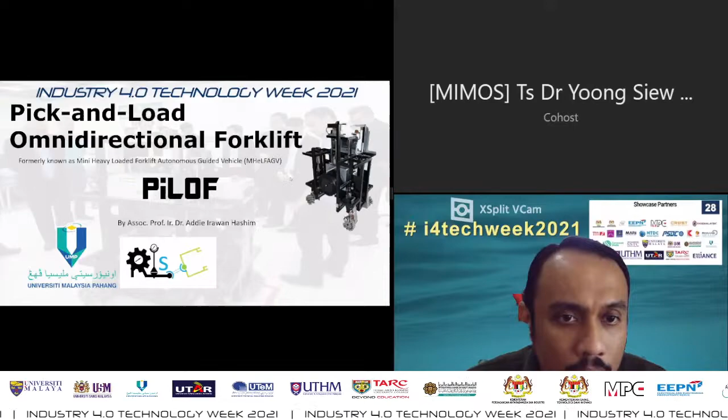For this slot, I would like to share about one of my projects with industries related to robotics in industries. For today's presentation, I will give some overview regarding the products I have developed with the company named Vacuumschmelze from Germany. This system we call the pick and load omnidirectional forklift.

This project, I'll go through the introduction first. It actually came from the idea that VAC, or Vacuumschmelze, would like to have a very small forklift, which was not available at that time in the market. This small forklift needed to have the capability to pick up quite heavy copper spools, which are their raw materials, weighing about 30 to 50 kilograms.

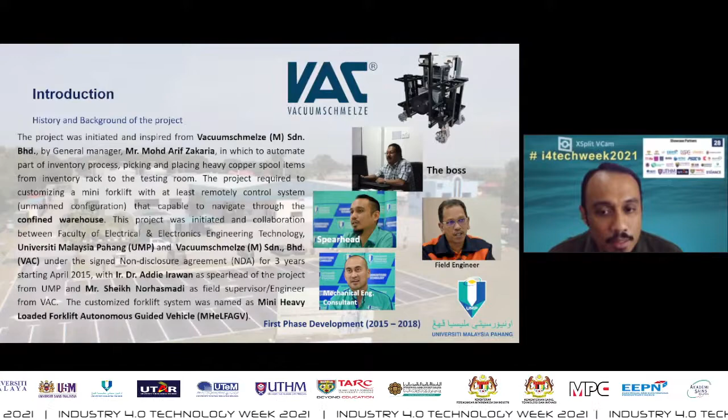From this idea, Mr. Arif, the boss there, called me for collaboration, and we teamed up into sub groups, one electrical and one mechanical, handled by my partner Dr. Akhtar, a mechanical engineering consultant, supported by their field engineers, Mr. Sheikh. We generally started the project with a capstone project from the students, then enhanced it in the internship program with VAC, and then continued into the final project.

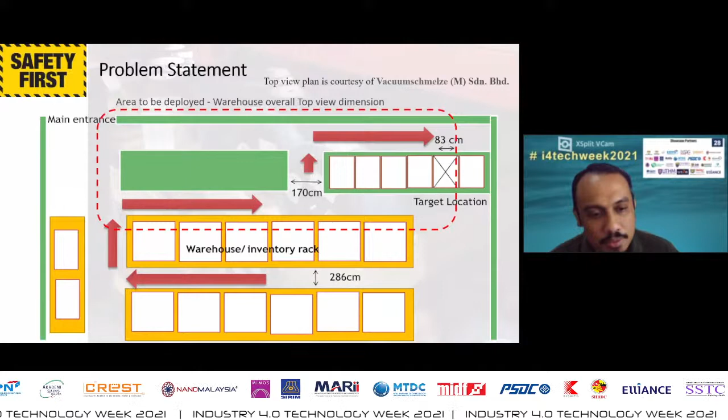In this project, we focus on the problem statement of their warehouse, which is very confined. These products focus on the confined area, which is about 1.7 meters square. The current warehouse is getting more confined because of the limitation of the place. The target area is very confined, and the current situation at VAC is getting packed and confined every several years because the area they have is not enough for storage.

For this first phase of the project, because after this we have a continuous project in the second phase, we target an inventory rack of a certain dimension, and we need to have a system that can pick and load inside the vehicle, not carry on with the vehicle. That's the main idea and the main target for this project.

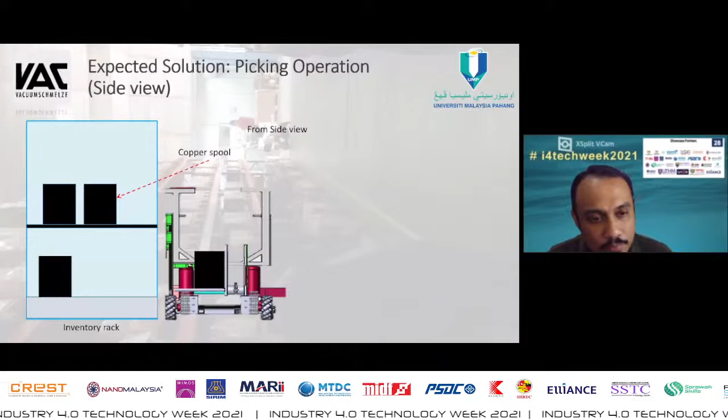We would like to bring these vehicles remotely, not manually pull the vehicles. Currently they use operators just using a pulley, which is quite difficult and heavy and very time consuming.

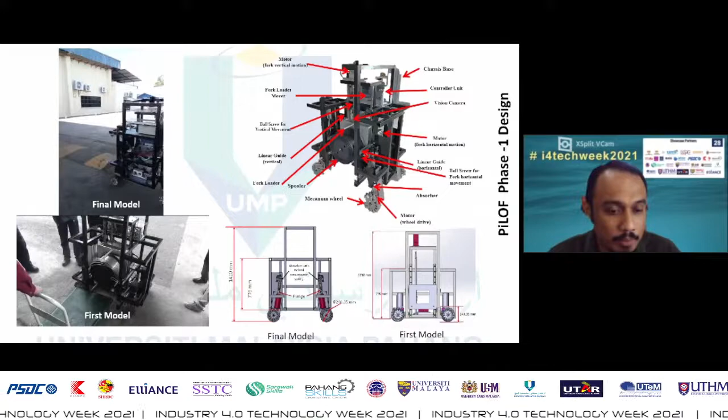In this first phase of the project, we developed starting from the conceptual design and first model until the final model. In terms of mechanical mechanisms, we designed and fabricated two models: the first model without suspension, as you can see in the slides, and the final model with suspension, because of the mecanum wheel that needed overall touching on the floor.

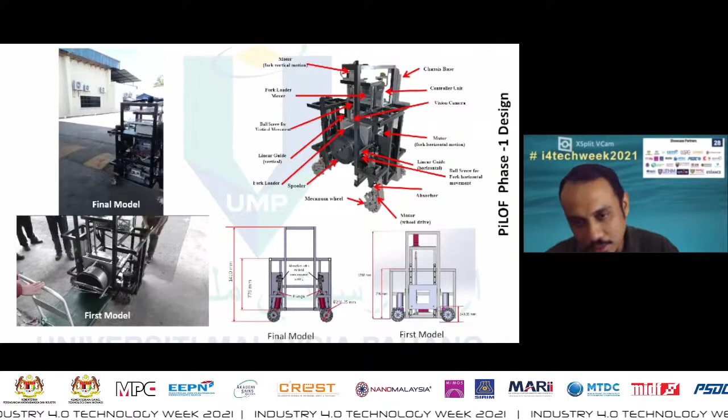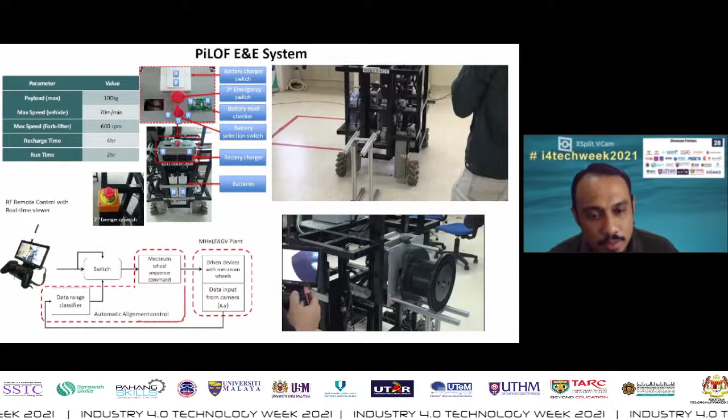For electronics, we basically have a very basic driver for the heavy torque motors, and also for the linear guide drivers. We also have real-time viewing from the remote control, so that users can see from the camera to slot the heavy spool inside the rack.

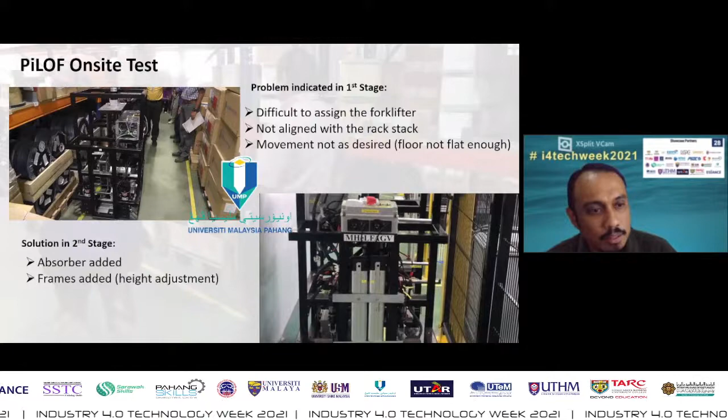So this is a problem which is when our first deployment, on the first model, we have difficulty to view, and difficulty to align the grasper, the lifter, according to the rack, because the rack changes depending on the countries.

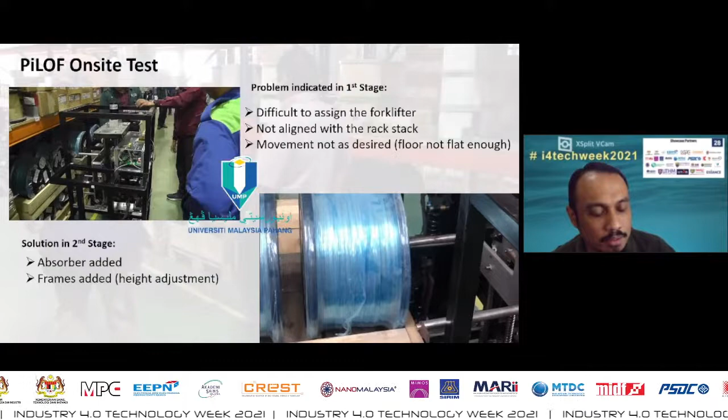The wood rack actually comes with a copper spool. So from there we changed to the second, the final model, which is we add the height of the forklift, and we add spring absorbers for the forklift, so that the wheel can overall touch the floor, because we found that some floors are uneven.

So for the current situation, as you can see in the second video, it's getting confined, and we need to do some improvement according to the speed, and also the viewing side, as well as try to add some autonomous elements in the second phase.

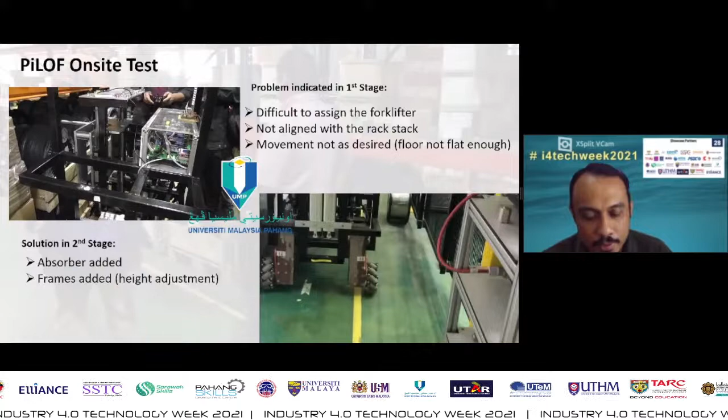For commercialization, these systems or structures can be redesigned for any scale required based on the customers, and can be reconstructed or retrofitted with IoT systems and autonomous elements for applications including medical logistics or pharmaceutical logistics, as well as farming, and also for office or classroom assistance.

I think that's all for my presentation. Thank you very much.

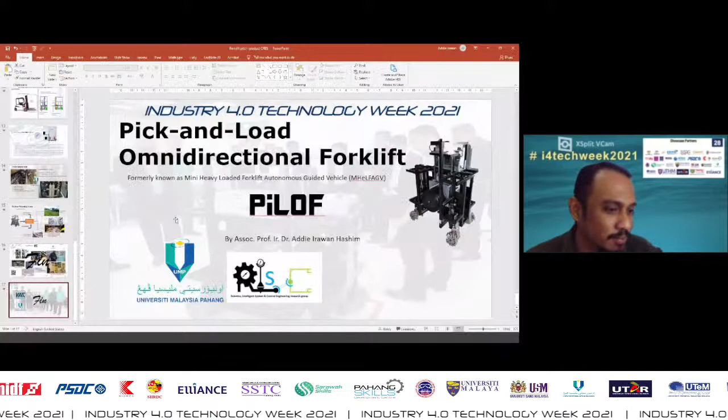The first question is, what is the speed of the vehicle, and how do you take care of safety, because speed can be a killer? Thank you. First question: I just forget about the speed. For the speed, it's actually we can go...

So for the speed, we can go about 70 meters per minute. Maximum, we can go about 600 RPM, but that depends on the button, because we have a button to regulate the speed. Currently we have feedback from the client that we need a system to regulate this on the screen on top of the vehicle. So we will take that response to improve in this semester.

Thank you. The second question: is this prototype automatic guided, or is it remotely controlled? It's remotely controlled. It was based on the client's requirement at that time, so remote control was enough, they said.

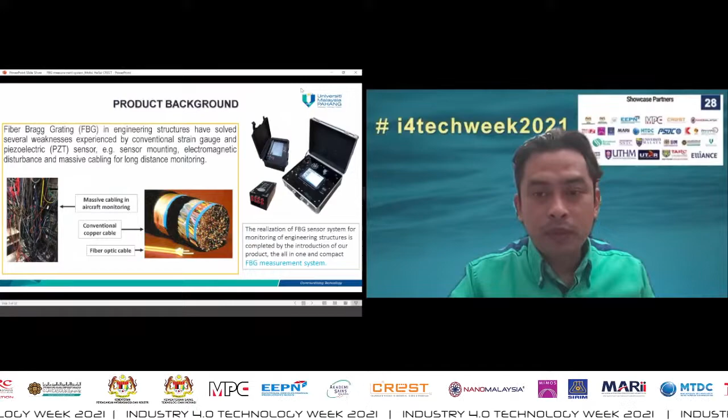The realization of the FBG sensor system for monitoring structures is completed by our introduction of our product, which is an all-in-one compact FBG measurement system. You can see through the pictures, there are a lot of versions of the system.

So let me bring you to the problem statement. Currently, as mentioned, piezoelectric strain gauges have problems as just mentioned. By turning to optical sensors, you can see the market value. If you use optical sensors, it grows every year, starting from the year 2020 at USD 1.5 billion.

They predicted this value for optical sensors will become 2.9 billion by 2025. So if we don't get involved in this industry with optical fiber, I think we are going to be behind, with the risk of not having a very compact measurement system. Nowadays we are talking about distributed sensors, more sensors in our structures and in our engineering structures generally.

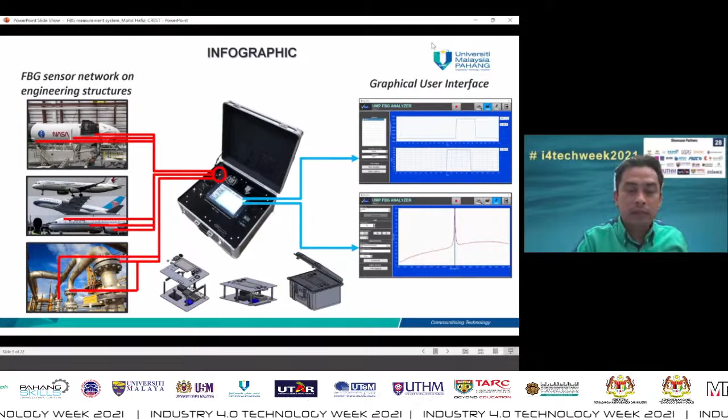So if you see the infographic of my invention, this is actually an all-in-one box for the fiber measurement system, and it's applied to any structure. Just connect to all the surroundings of the structure, then connect to this little box, and you can see the software or graphical user interface showing the real-time status of whatever happens to the structures we measure. I want to stress the IR 4.0 element.

This product supports the fourth industrial revolution, whereby it offers, like I said, a distributed sensor system, so that the sensor system will provide us real-time monitoring, and then we can collect big data for all the structures we measure, for future development and also for safety purposes.

So imagine we have bridges and infrastructures. Let's say we have 100 FBG sensors mounted on whatever section we want to measure. It can connect directly to our measurement system.

So this is the distributed sensor network I just mentioned. With this fiber optic sensor, we can connect all the sensors in series, in an array. We call this the FBG sensor array, so that all the information can directly go to the measurement system through multiplexing.

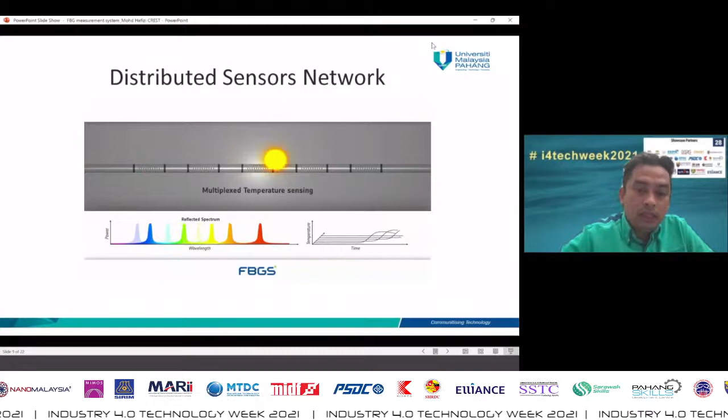So you see this video. Let's say we have multiplex sensors, and then we have a heat moving. The colors' wavelength refers to the information that we receive, so we can see this information in real time.

But in this example I'm only showing about one sensor. Imagine that we have 100 sensors. We can see all the information through the sensors.

So the potential users for the system are the Jabatan Kerja Raya, for the maintenance of buildings, highways management, and dams. We have chemical plants like Petronas and Shell, and pipelines in chemical plants. We also can use the system to monitor structures, the safety of the structure as well.

There are a lot of engineering applications worldwide. We have bridges already done in Portugal. We have a lot of monitoring using FBG sensors in Portugal, Hong Kong, and also railways in Italy. We have monitoring for pipelines in China.

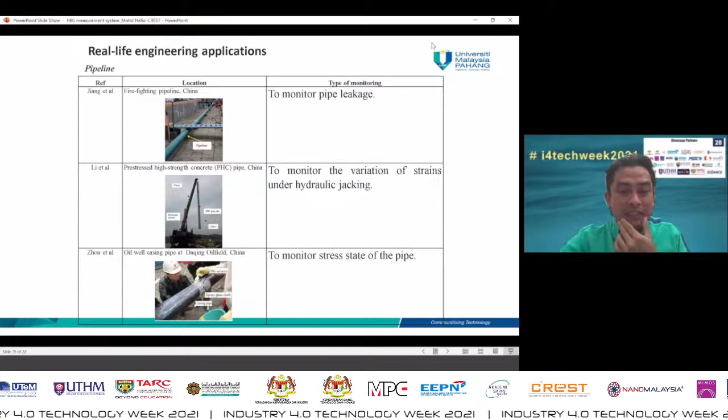Also, we have the system to monitor pre-stressed high strength concrete during development and manufacturing, and also oil and gas casing pipes. This is actually what has already been done by others using the sensors, not by us.

But in UMP, I built the reader with the system that can read the information from the sensor. So I patented this system under two patents: first is online impact damage monitoring, and the second one is apparatus to monitor static and dynamic signals.

This is my collaboration with KPT, Kementerian Pendidikan Tinggi, and also UMP and UMP Technology, and my partners, the Photonic Research Center. My clients are Petronas, UTP, and also Universiti Kebangsaan Malaysia.

So that's all my presentation about the system. Thank you very much. I hope that I can give you an insight of what a fiber grating measurement system is. Thank you very much.

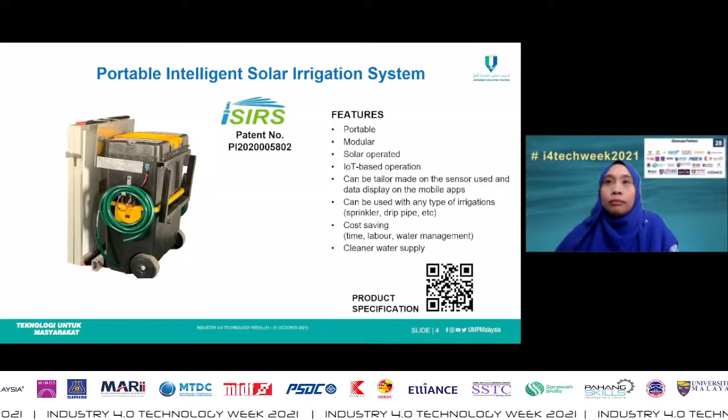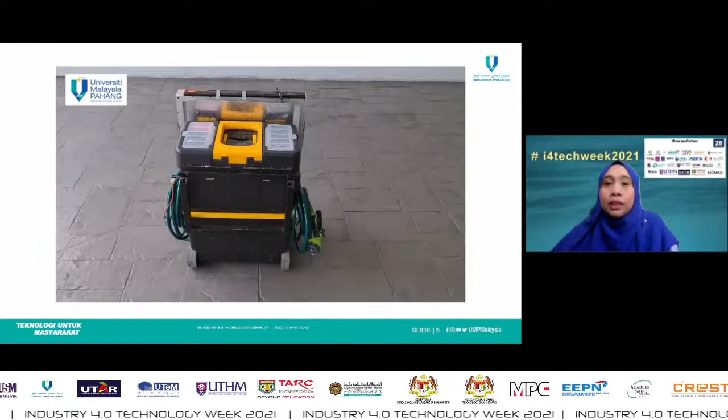These are some demonstration videos I prepared with my students to show the functionality of the product. As you can see, it uses PV panels that can be flipped. Because most electrical water pumps use electricity to operate, it is quite difficult to use such products at farms with no electrical power supply, and most farms or planting areas are actually far from the electrical grid. The iSIRS also uses solar energy as a power supply, and uses a mobile app as a remote controller as well as a monitoring system.

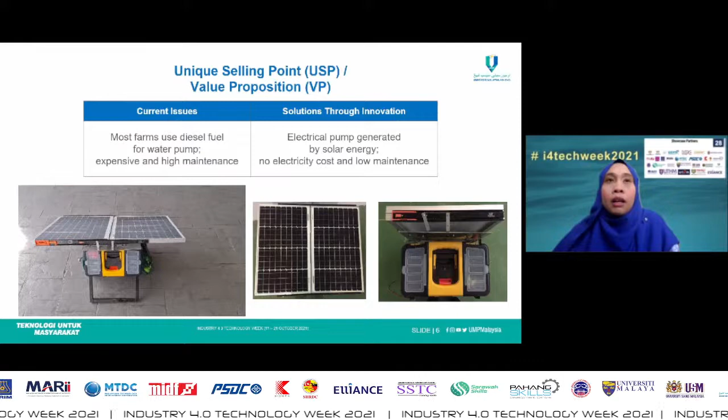This product has two PV photovoltaic panels that can be flipped for storage. During operation, the solar panels can be expanded and tilted into position to obtain maximum sun exposure. The iSIRS is also equipped with a backup battery that can power the system when there isn't enough sunlight.

The operation of our product can be done remotely using a smartphone via a mobile app that my students developed. Using this mobile application, the user or farmer can monitor the surrounding environment based on environmental sensors installed on the product, and it can be customized based on the farmer's needs. Users do not have to worry about leaving their home or farm because it has been taken care of by our product, and it can be operated and monitored anywhere.

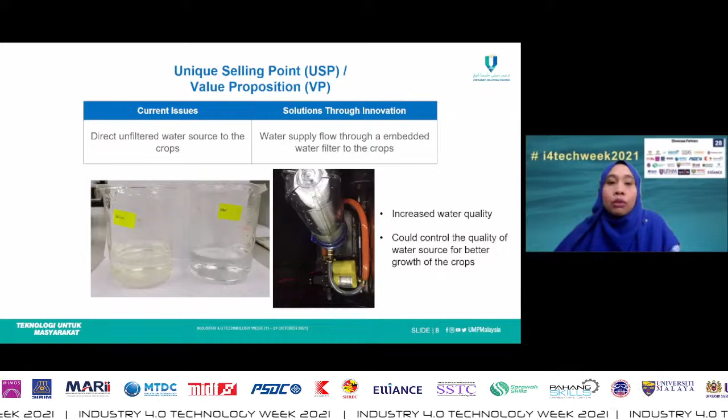We also installed a water filter inside the iSIRS to increase water quality to the farm, helping supply a cleaner water source for better crop growth. We provide an off-the-shelf product that can be used with any type of irrigation such as sprinklers, water drip systems, and is compatible with any type of hose nozzle. This shows that our product is portable to be operated anywhere, anytime.

Last year, in 2020, we filed a patent application in Malaysia which is pending approval. The product uses multiple sensors on the perception layer together with a water pump and battery management system. Those systems are linked to a server at the network layer before connecting to the application layer via a smartphone.

So far, we have received several recognitions from the exhibitions we participated in before. In 2018, we developed the proof of concept prototype before coming out with this product, and presented the idea at International Warsaw Invention Show 2019, where we received a bronze medal.

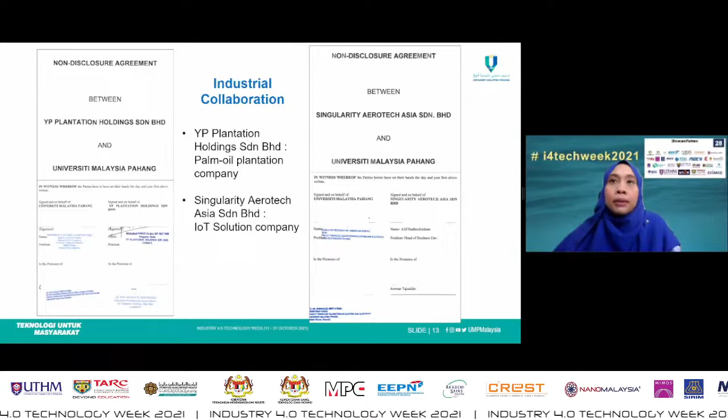Currently, we are collaborating with two industry partners: a palm oil company, YP Plantation Holdings Sdn Bhd, which is under the Yayasan Pahang subsidiary, and also Singularity Aerotech Asia Sdn Bhd, an engineering and technology solutions company. These collaborations would support us in developing and enhancing the practicality of the product, and also perhaps future projects.

Last month, UMP and Singularity Aerotech Asia signed an MOU in a virtual signing ceremony to expand the collaboration beyond research, mostly related to graduate employability and training programs.

The further work we're going to do after this is to conduct more real site testing for market validation, integrate with other sensors that are crucial for agriculture, work on more efficient methods in communication and control systems, as well as develop a more user-friendly interface for farmers to use and understand.

These are my team members working on this prototype and also industrial grant projects under our own Smart Agrotech UMP cluster. We are also involving some students, mainly from undergraduate final year projects, in helping us with the project we are currently working on.

So I think that is the end of my presentation. I can be contacted via phone and email for further discussion and collaboration. Thank you for your kind attention.

Okay, back to you, Dr. Lee. Thank you. Thank you, Dr. Rosalisa. Very interesting project, very practical. Now there are a few questions from the ground. The first one is from Fauzan Nasir, Bernama Press.

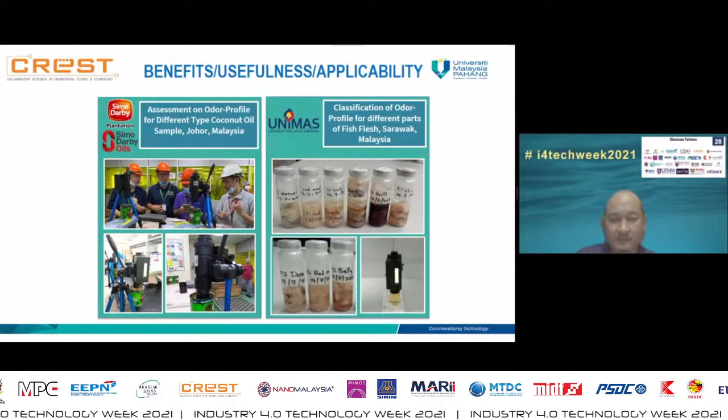We have some memorandum of agreement with a company. This is the environment application, used at landfill, at factory, and currently we collect data for about 6 to 8 months at a station in UMP, one of the stations, which is the STP, sewage treatment plant. We collect the data.

Currently we are collecting at one of the river water stations, to put the baseline of the library and see how many changes from the baseline to what is happening in the river. You can monitor 24 hours.

Sometimes I go at night, at lunch, at daytime. So there are changes. You don't know what is the source of why the odor is different, but maybe from the source - the pollution of the river gives effect to the variance of the odor.

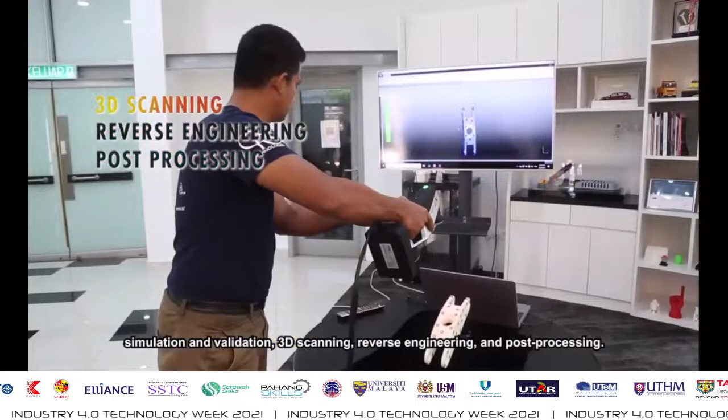Mumtech is a comprehensive end-to-end online additive manufacturing service platform for automotive suppliers and the public to access a wide range of services, from design optimization, simulation and validation, 3D scanning, reverse engineering, and post-processing. Mumtech can 3D print any design size and shape through an easy, fast, and secure platform without any manufacturing limitations.

To begin, clients can access the Mumtech platform by going to www.mumtech.com.my. Clients can upload or drag and drop any 3D model file format, customize the printing parameters to obtain the desired results, and get instant quotations right from the dashboard. Specialists at Mumtech will process the 3D model using finite element analysis to ensure only high-quality products will be 3D printed to meet the design requirements.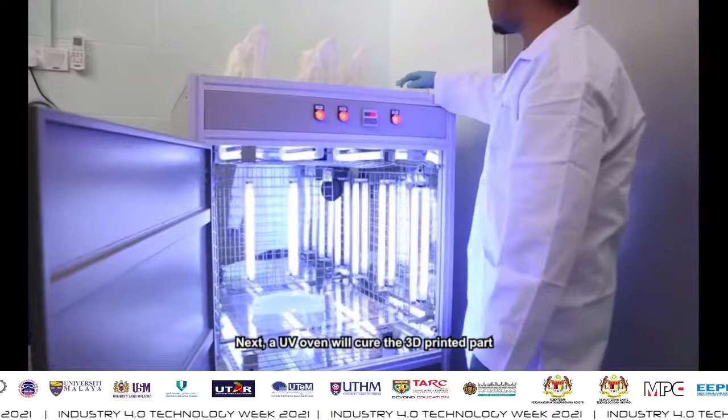The fresh 3D printed part is then taken out and submerged in an ultrasonic washing tank with isopropyl alcohol to remove its support structures. Next, a UV oven will cure the 3D printed part until it reaches its maximum mechanical properties before moving to painting and coating for surface treatment. The printed products will then be securely packed and shipped to the clients, delivered right to the client's doorstep.

Hear what some of our clients have to say about Mumtech.

I'm thankful to MARii for developing the Mumtech program. This is very beneficial for us engineers to stay updated with current engineering technologies, and the workflow for engineering analysis and design optimization is very easy to understand. We are lucky to use top software such as CATIA, Materialise, and Shining 3D, which provide results in terms of high accuracy and surface finish. Basically, it expedites the process.

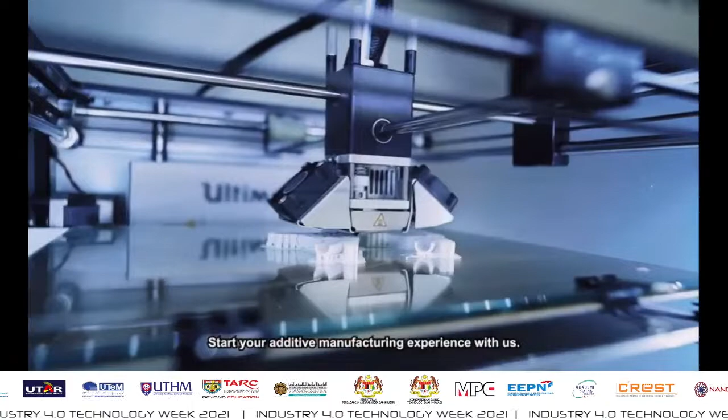The digitalization of design is inevitable. Digital design strategies are now a basic requirement to remain competitive. It optimizes cost, maximizes function, and significantly reduces lead times. For many, technology may be a daunting prospect. It is for this very reason MASEC is the solution.

MASEC was established to lower the barrier to entry for digital design technology to be adopted by all. It is equipped with the latest CAE solutions and high-performance hardware to become a design validation hub, enhancing Malaysian design and inculcating high-value design capabilities.

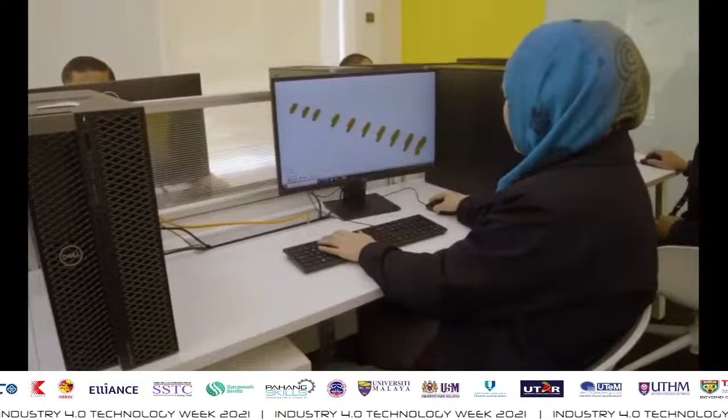MASEC will accelerate Industry 4.0 technology adoption in advanced manufacturing, especially in the mobility sector. Its location is strategic, as it is within Malaysia's hub for digital design and development. The collaboration between government, OEM, suppliers, and academia allows component manufacturers to enhance participation in the upstream processes of product development.

MASEC elevates the supplier's capabilities to be able to not only design advanced products, but also the tooling and process design. MASEC will be a game changer for the mobility sector towards improved designs and creating high value-added jobs and products. MASEC: the gateway to advancing simulation.

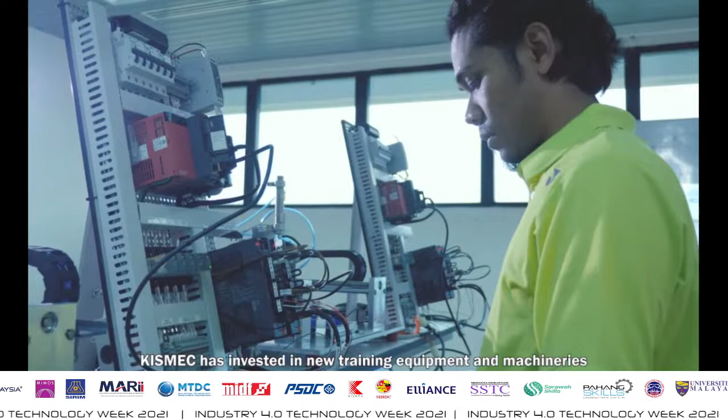KISMEC has invested in new training equipment and machineries such as APAS Collaborative Robot, Bosch Didactic Workbench, Festo, MPS 4.0, IoT Gateway, Bosch Smart Sensor, and Smart CCTV. We have upgraded our trainer skills and our center certification. Currently, our trainers have been certified as Malaysian Meister Trainer from Aachen, Germany, and Bosch trained the trainer in Basic Automation Industry 4.0.

To complement industrial requirements, we shall continuously develop new training programs. With strategic partnerships and collaboration across the globe, KISMEC offers a wide range of training programs conducted by our own highly qualified trainers in various fields of expertise.

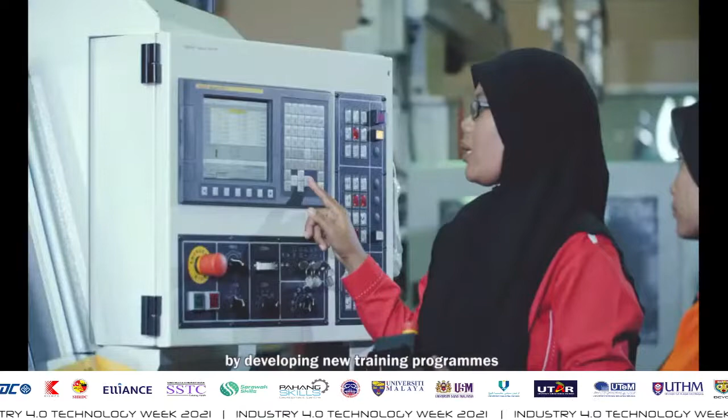We continuously strive to be the preferred training partner by developing new training programs and upskilling our certified trainers. KISMEC's trainers are certified and experts in their respective fields upon completion of training obtained locally and overseas: vocational training officers and HRDF certified trainers, Malaysian Meister trainers, Bosch Basic Automation Industry 4.0 Master trainers.

At KISMEC, we offer conducive learning and training environments. Our facilities and laboratories are equipped with some of the latest machines and simulation equipment to create a seamless transition from classroom to job. KISMEC offers a wide range of Industry 4.0 programs, such as Industrial Internet of Things, Smart Sensor Technology, Cybersecurity, Implementation of Industrial Automation, Cloud Computing, Data Analytics, Autonomous Robot, and Factory Automation Configuration.

When I first heard about IoT technology, I still had a cloud in my mind. From there, I'm learning the concept of IoT, where it is a vast domain and an integration of existing technologies. For me, it's a new experience where I gain new knowledge in IoT technology, especially on Bosch XDK sensor, which I believe everyone is already aware of.

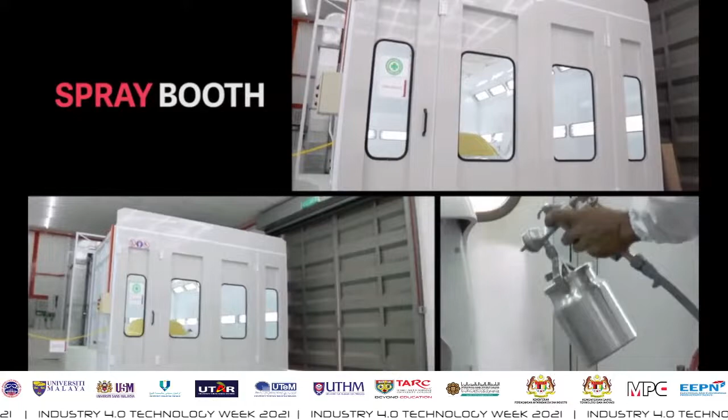Welcome back again for session number 5. We will continue with the next few topics here from IUC, UM, and UTM. So the topic from IUC represented by me is called Individualized Manufacturing Solution with RAMI 4.0 Architecture.

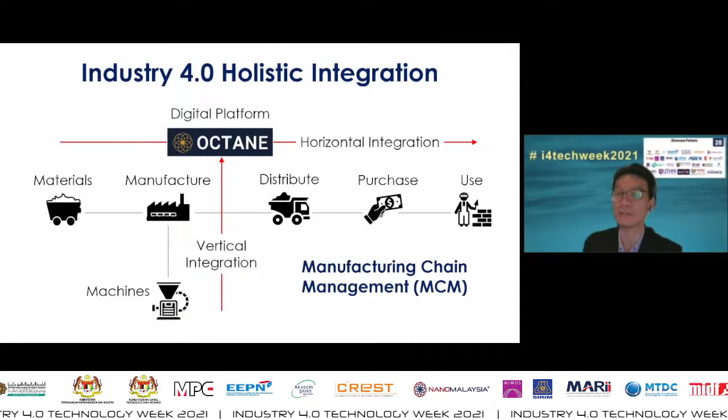So now for this holistic integration, you need to have a platform to integrate vertically and horizontally. Actually, we built a digital platform for this integration, holistic integration. We call it Manufacturing Chain Management, MCM. Now, this holistic integration actually follows the German reference architecture.

We call it the reference architecture model Industry 4.0, or RAMI 4.0, defined by Germany in 2013. This diagram looks very simple, but it has 3 axes. The first one is called manufacturing operation, going from product, field devices, control device, station, work center, enterprise, to connected world. Actually the SCADA, MES, ERP, and apps connected world is in the vertical integration, including robotics.

So many of the technology enablers, the 11 pillars in Industry 4.0, fall onto this vertical integration for automation purposes. This is actually IR 3.0, completely vertical integrated, because the model originates from Purdue University. They call it the Purdue model, and they have an IEC standard for this purpose. So this is IR 3.0.

Now in IR 4.0, you need 2 more axes. According to Germany's definition of Industry 4.0, the 4th Industrial Revolution, it focuses on manufacturing, so you need one more axis, called horizontal integration. This one is for business operation, integrating horizontally your value chain from raw material until the user, until waste recycling.

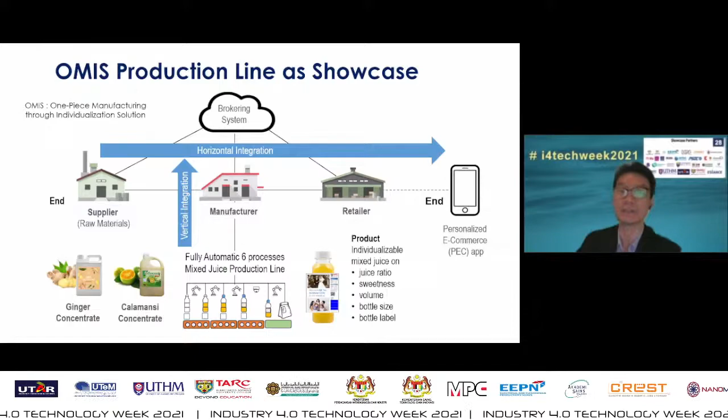Now you can see from here, this demonstrates the vertical and horizontal integration. This architecture and the industrial partners together with TARC built this line. Actually we have around 12 to 13 industries, and you can see from each layer and each level there are different companies participating and contributing their solutions to complete this RAMI 4.0.

So I showed you this is how the OMIS line looks like in TARC. And you have 6 processes here: loading first, then filling, capping, printing, unloading, and also you have the packaging process.

Actually, this whole process here has no one in between, because the customer orders the juice using the apps, setting all the juice they want. Then you come here, this line will run by itself, produce, print your delivery address on the packaging, and pack into a delivery bag automatically. So actually the people in between are removed.

This is actually one of the C2B models, customer to business model, because a lot of e-commerce now is B2C, mass production in manufacturing. You mass produce because manufacturing has a minimum quantity order, you cannot produce just one, so you ask customers to buy whatever you make. So it's B2C in e-commerce. The only thing you can do is compete on pricing, because everyone sells the same thing, so whoever is cheaper sells better. Or you find a manufacturer with better quality or different design. That is the business model for B2C.

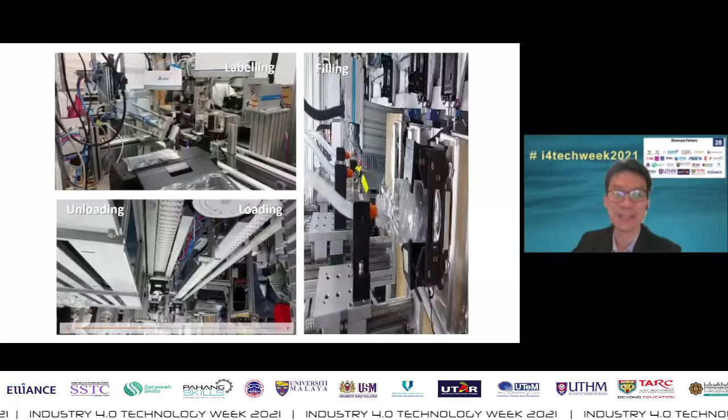Now I'll show you how the line looks. This is how the line looks, and it runs in reverse, upside down, we call it upside down. You can see on top there is the labeling, and at the bottom it's already upside down. This is the conveyor, and you can see they have RFID tracking here to track the individual products. Then this is the filling process. So it successfully demonstrates how individualized production is going to work.

Now, what can the OMIS line contribute to SMEs in this Industry 4.0 era? The first thing is to create a digital twin for learning, to foster many Industry 4.0 architects. We stress on the architecture. Now, if you want to train this Industry 4.0 architect, you need to buy equipment, buy an Industrial 4.0 physical production line.

Let's say you have 8 learning centers, you need to buy 8 units of this very expensive Industrial 4.0 line. So now you have 3 challenges. You have a very high investment, definitely, because everyone buys a single unit, and you may not fully utilize it because each center may not have students to learn at all times. Sometimes it sits there and you depreciate it year to year. This is one challenge, the other is high maintenance costs.

Actually, Malaysians had a grant to buy this line, but they have no fund for maintenance, so they need to look for maintenance funding. A lot of projects get abandoned because of no maintenance costs. Imagine you have 8 sites to maintain, the cost is very high. The last challenge is you have different learning content, because different people build different content, so you learn differently. So you do not have a central place to refine and strengthen the content for producing Industrial 4.0 architects.

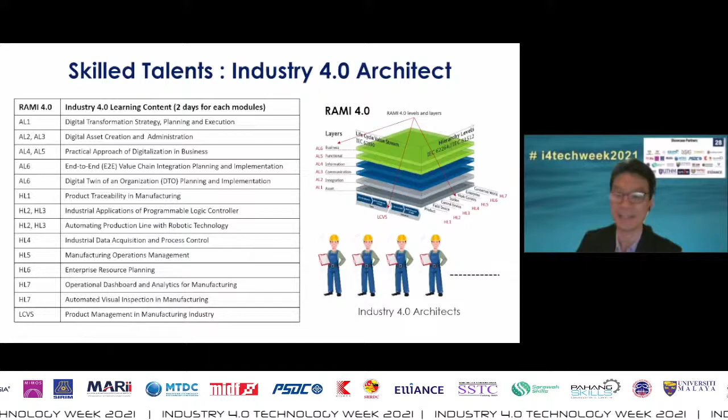Now, the second thing that the OMIS line can contribute is to produce the digital solution. So we solved the first one, talent shortage. The second one is to overcome the SME digital solution problem - they don't have a digital solution.

Of course you can buy it, you've got money, you can buy, but you're going to have an issue of affordability and scalability later on. Okay, so currently...

what the Industry4WRD Intervention Fund does, they build a POC. Many of them generally ask them to do digitization, right? And then they ask them to purchase the enterprise resource planning, and then they do the integration. They pass the data...

into the ERP selectively - not all data, because ERP doesn't store all this sensor data in real-time, so they need to be selective. Then they store it inside the database of their own system built for the company.

Let's say, for example, you do IoT, you build one database. And then people come and do another IoT, build another database. So you've got many databases. That's the challenge, because you don't have a central place. So scalability is the issue.

You can produce a proof of concept, no issue. But how about 10 machines, 20 machines, 30 machines, 2 factories, 3 factories, 4 factories, the whole supply chain? How are you going to scale? That's why a lot of SMEs are reluctant to move forward.

Although they get the grant, a matching grant maximum of only 500K, 250. So if they go into it, they need to sustain it year after year. So you must create value for the company.

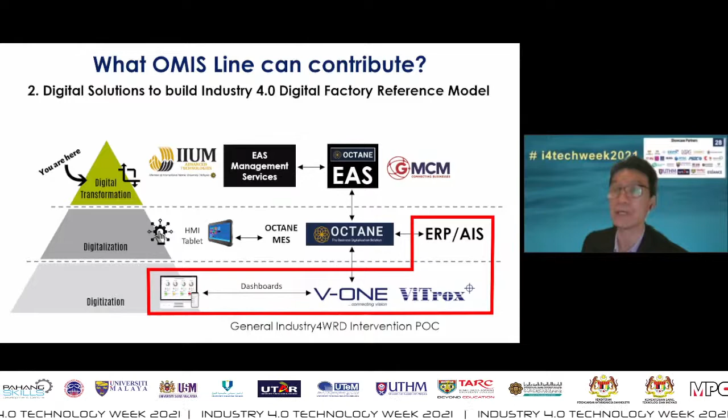Then only they can improve the yield, they can improve the lead time by how many percent, the labor efficiency, machine effectiveness, all this. Not only OEE, because OEE is only for process monitoring, not for business improvement. So you need one more layer for this.

Now, of course, SME are constrained in their budget, and they are spending, and also sustainability. So for scaling, we need to have our own homegrown solution in Malaysia. For example, V-ONE is making a very good dashboard display, IoT data collection, data machine integration, very successful, very good systems here. And you need to have Octane as a platform for them to create systems, and then they can create this MES for them to run their business manufacturing operation.

So then we need someone to do process intelligence. For example, from IIUM Advanced Technology Sdn Bhd, one of their spin-off companies to do this process intelligence, so that they can get all the data from the database. Now this is how the digital solution for Industrial 4.0 digital factory looks like.

So this is Industrial 3.0. Here you have your SQL, ERP, enterprise builder. This actually is a Malaysian brand. You can see that they don't integrate together. Machine is machine, top floor is top floor. So the first thing here you need to do is integration.

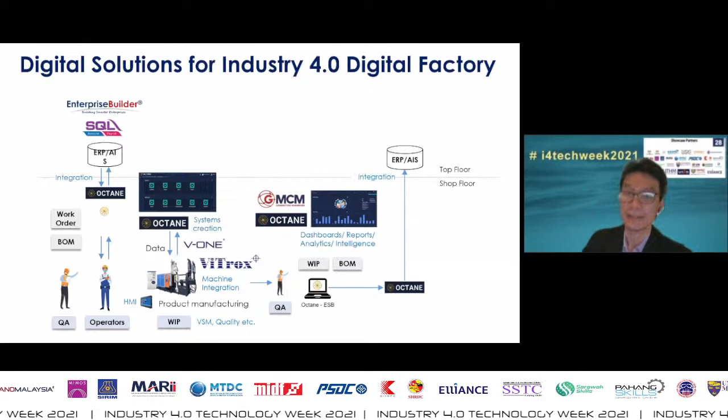And then followed by the system creation to create a lot of systems for digitalization. For quality, for inventory, for maintenance, for production, you need systems. Even for servicing, even for labor cost management, all these you need systems. Okay, and then later on you need to do dashboard, report, analytic, or intelligence. And all this data here, you need to collect into one place.

They call it enterprise asset space here. You gather all the data, and then you can start to do management services in process intelligence. So this is actually a very systematic and structured way of how you can guide the industry from the beginning until the end. It's a journey in digital transformation.

Now, how does this architecture look? EAS architecture looks like this: you have a layer called data sources, and here you need to do integration. You need to define asset. This is axis number 2 in RAMI 4.0 asset. Define asset means we only select certain assets, certain data which has great value for the company.

We need this as an asset, so you need to collect them in real time and collect all of it. Then after that, you need to provide some modules so that they can create the assets they want, create the system they want, do the machine integration they want. This is no code or low code, meaning it's done by setting only. You don't need to hire any SI to do programming anymore.

So it's very flexible. But it's not enough, because providing them digitalization modules is just operation, there's no intelligence involved. This digitalization module creates even more data compared to the data from the shop floor. All this data here will be collected in the EAS, and then you need to do process intelligence.

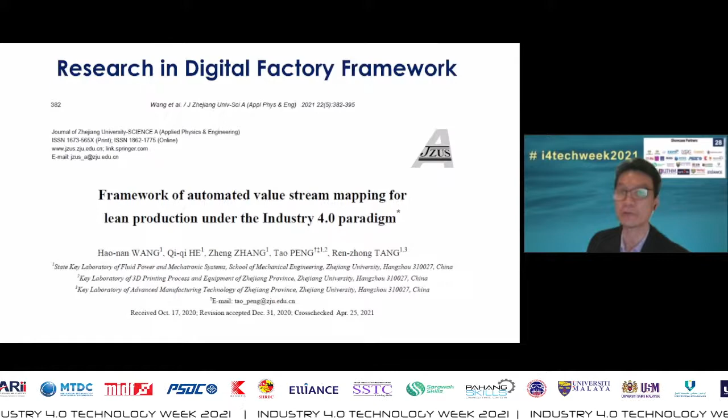Now it looks like this way. Very complicated, but you don't need to worry. Actually, there are 3 levels. Now, if you have integrated manufacturing processes, you do it vertically and horizontally, you get all this. Now definitely you're going to have a data level one. This data level is all the data that you collect from different various data sources here.

Now, if your company is big it's fine, but for SME, you create so many databases, and then you will create a lot of data acquisition issues. So this is the data level. After you organize the data, you go up to the information layer level. And then finally, you have a knowledge level.

This framework was proposed by them in China earlier this year. Now you can see we map one by one. The data level actually is an enterprise access space. I told you just now, you can create a lot of systems here, you can do all integration. Actually, this is the EAS for this data level.

And then when you go up to the information level to transform the data into information, this is called manufacturing chain management. And we built one platform for this purpose, we call it Optic. Finally, this is the knowledge level.

You need AI. You utilize the process information, and then you can create a lot of assets. Outcome as asset, outcome of the analytic intelligence as asset in the EAS, and then you can use the dashboard module to create the dashboard you want and compare to all the process assets you have in the manufacturing shop floor. Actually, this process here is very valuable.

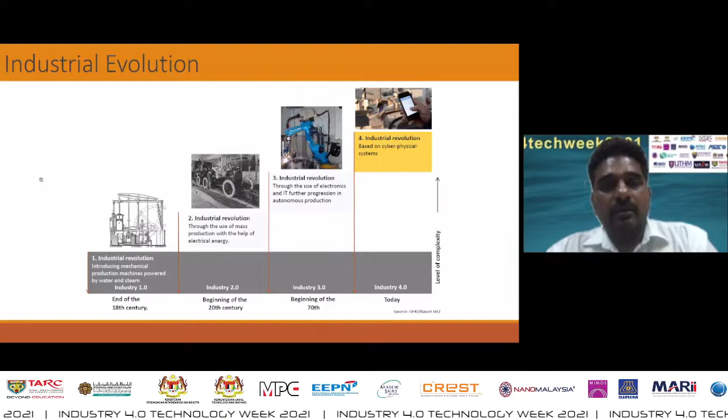The industrial revolution has been progressing from 1.0, 2.0, 3.0, and finally we are here at 4.0, where the growth of Industrial Revolution 4.0 is seen to be exponential. We should be aware that many industries, be it MNCs or SMEs, especially SMEs, are still struggling at the range of 2.0 and 3.0. We have identified that many SMEs have difficulty absorbing themselves into 4.0 due to lack of facility and know-how knowledge in adapting to Industry 4.0. We have been facilitating industry, especially SMEs, in upgrading themselves in the context of digitization so they can adapt automation eventually in order to increase the productivity of their output. We have also looked into encouraging SMEs to develop end products rather than providing design services alone as their company output.

Next. So basically what we are looking at as a problem statement is the disadvantage companies face in lacking speed, communication, connectivity, system integration, and intelligence, especially in the manufacturing environment. Our aim is to develop an Industrial 4.0 platform, especially for supply chain management, with collaboration of research centers, industries, and expertise from University Malaya altogether. We are in the quest of addressing these challenges in the context of communication, connectivity, and system integration, and to strengthen the digital connectivity between industry and education through efforts such as training of resources. Next.

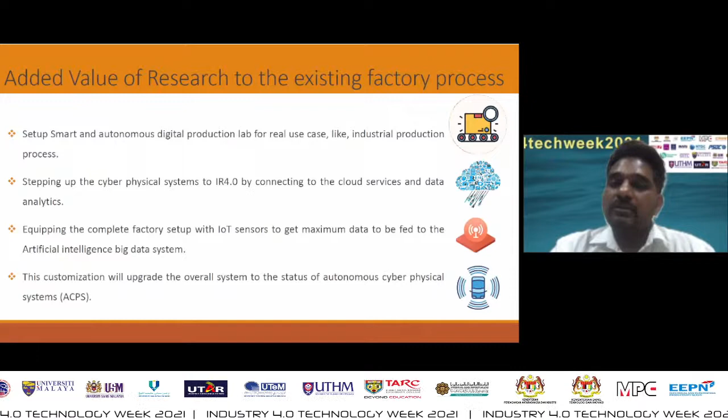So we are also looking into stepping up the cyber physical system to IR 4.0 by connecting cloud services and data analytics. This is done in collaboration with our partners in the Faculty of Computer Science, where the expertise is derived from their research centers over there.

So we're equipping the complete factory setup with IoT sensors. This is basically our main expertise, which lies in IoT sensors, to get maximum data to be fed to the artificial intelligence big data system. This customization will upgrade the overall system to the status of an autonomous cyber physical system.

So these are some of the work expertise that CRI 4.0 can embark on, as we have good experience and good capability in terms of the delivery of the end product in the aspects highlighted here.

So the research application and benefits out of the projects being developed in CRI 4.0 include a lot of reduced costs in terms of process, optimization of available resources, time efficiency, risk reduction and prediction, especially in the manufacturing of E&E products, making the industry more market competitive. Basically, we are able to improve process control and the management system altogether.

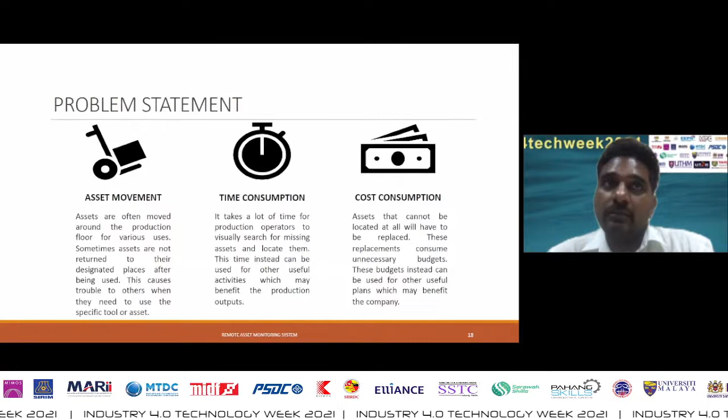So in this project, we actually developed an algorithm and the necessary facility to optimize the placement of the anchors in the environment and the dedicated environment planning of the factory, where the environment planning of the factory in this context is OSRAM.

So the optimization of the placement of the anchor through Bluetooth technology provides us the ability to do localization in order to continuously monitor and detect the movement of the asset. This project is currently ongoing, and we have completed about 50% of it already.

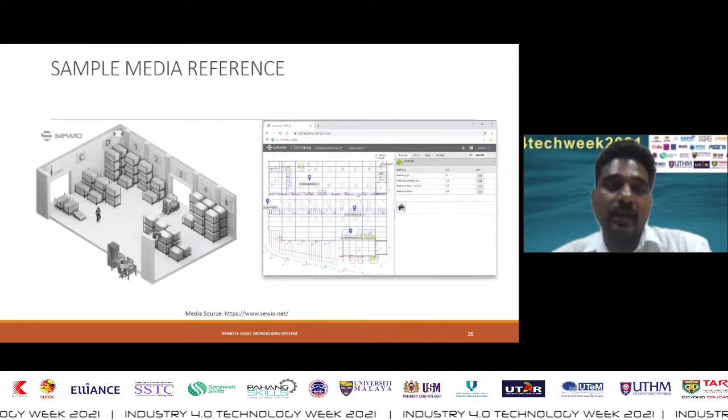So this is another video where the algorithm will visualize the movement of the asset and how the anchors are placed in an optimized environment in the existence of blockers, in order to continuously detect the movement of the asset. I guess the video couldn't be played here as this is a PDF file. The algorithm is developed to optimize and use a minimum number of anchors in order to realize this remote asset monitoring system.

If you're able to view the video embedded into the slides, it will give you a very good overview of the dashboard system being developed to continuously monitor the logistics environment. That's all from CRI 4.0. Thank you for your attention.

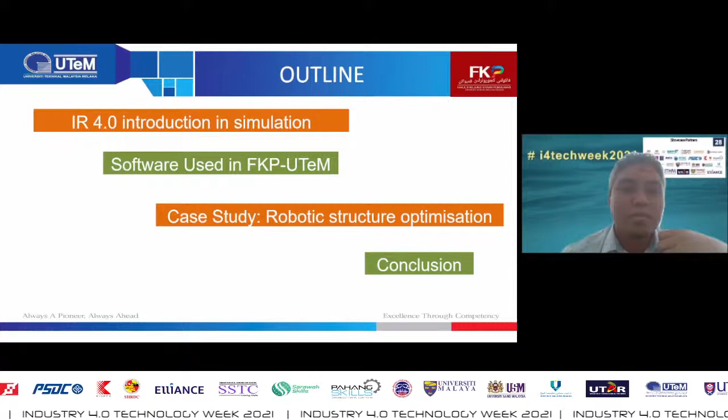If you see the pillars of the 4th Industrial Revolution - I'm sure there are many experts here - before this, I already explained some about big data analytics, autonomous robots, and so on. That is already covered, and IoT. I'm sure the speakers before this spoke about this technology.

As you see, there are 11 technology pillars, which includes simulation. In some recent publications, they have reduced the number of pillars, but in my opinion, the 11 pillars should stick - the more pillars, the more area we support toward the 4th Industrial Revolution, the better.

For this, simulation can contribute to, for example, accelerated technologies, modeling, and advanced analysis. Yes, it has been started by many companies, but still a lot more companies haven't used simulation as a tool. So I think this is an area that companies can focus on.

What is the simulation tools in FKP that we use here? We use it to simulate new products and new mechanism designs. Other than that, the simulation is also used for the manufacturing process.

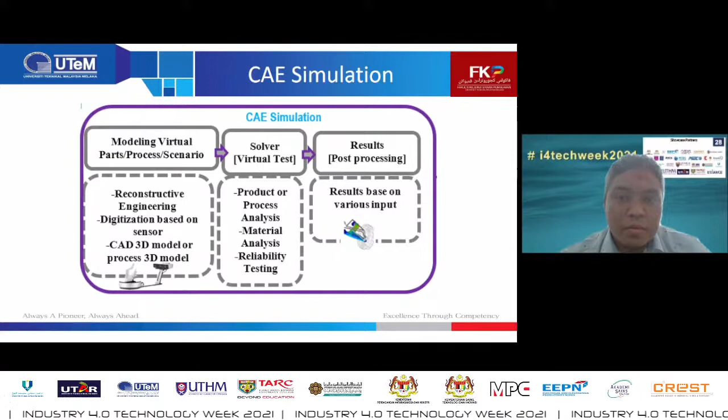We have 5 more minutes, Doctor. 5 more minutes. All right, I'll be quick.

All right, the software tools that we use here, we have the ANSYS student version. The advantage of this ANSYS student version is it can be installed and used by any user, and it's valid for 1 year.

That's why we use it for our laboratory training, because we replicate some of our lab, and let our students do the simulation and so on, because ANSYS gives this advantage and can solve a lot of problems.

And this is basically the 3 steps, so I go directly to the examples. This is an example that I created using the student software robots, where this is the crawl bots. We conducted an optimization study to optimize this robot structure.

For example, we optimize the linkage length. The linkage length optimization means, for example, we set that the distance between the front gap, the front leg and the end leg, has to be at a certain distance, and what length should we put in the optimum value so that we have those results. So that is the optimization.

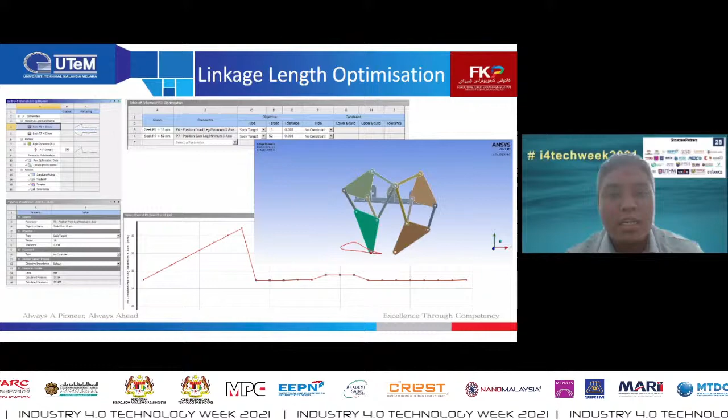This kind of optimization can actually be solved using this design, DOE, which is embedded in the ANSYS software. That's the advantage, and that's why we are now promoting this kind of software, because sometimes people use DOE with different software, but in ANSYS, the optimization and the DOE are both inside this software.

There are a lot more steps to get to these results, but due to the time constraint I cannot explain step by step, so this is just what is possible to achieve.

Secondly is the optimization through the fundamental frequency. Why do we want to optimize based on fundamental frequency? The first figure you see is 140 hertz. From this 140 hertz, we optimize this structure.

On the right figure you see 164, the frequency is higher. When we optimize this structure, not only do we reduce the mass, but the fundamental frequency is also higher, meaning the natural frequency occurs at a higher frequency.

So with this optimization based on fundamental frequency, we not only reduce the mass, but also the vibration occurs at a higher frequency. That is also achievable using this.

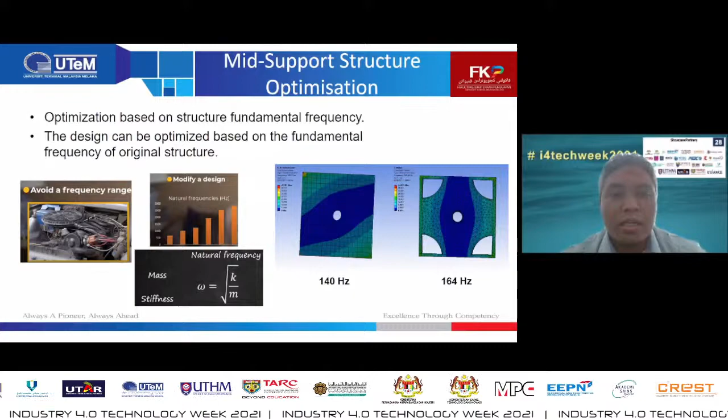Other than that, there's the mid-support optimization. From the normal supports here, we run a topology optimization, and then put some constraint on the right hand side.

So this is very useful, for example, if you want to optimize your structure to make this robot move faster, and use less material and so on. It's also very useful for 3D printing technology.

And lastly, this is another part from the robots that I want to improve. I just want to show you the upper figure and lower figure are slightly different because it depends on the setting. For example, you can see at the bottom of the parts here, we don't want to remove it. So that's why we can run it, and the computer will suggest what structure we should have, and so on.

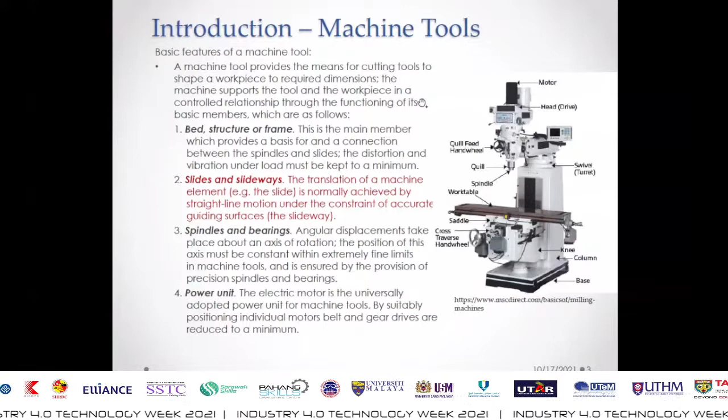Next slide please. In machine tools, the idea here is that we would like to have as accurate and as precise a product as possible. So the main aim is for the tracking error to be as low as possible, and ideally to be at 0.

Next slide please. Okay, so this is basically my work, developing a controller. The basic idea is that it's a feedback loop, only for the motion, let's go to the table positioning. Next slide, slide number 6 now.

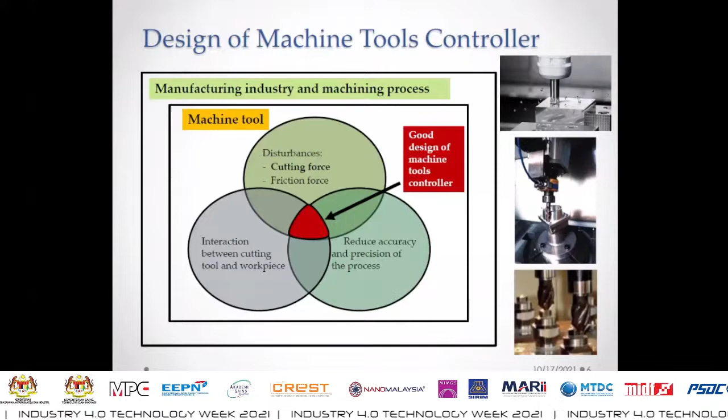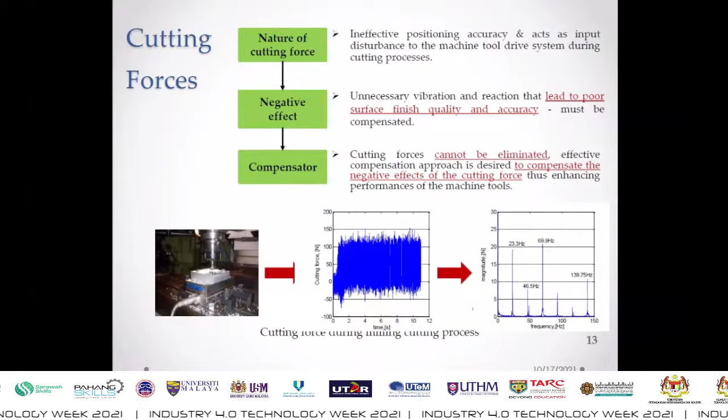With this idea, in slides 14 and 15, we use a control approach whereby since we know the type of input disturbance entering the machine, we could eliminate those peaks using an observer design, using a disturbance force observer with an inverse model base. We could also include a friction model to compensate both the friction force and the cutting force simultaneously. This could be extended to any mechanism with vibration impact due to rotating spindle.